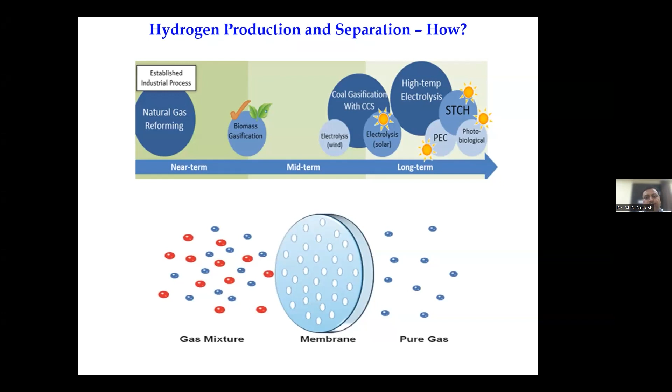So here in this slide, you can see how different characterization results of hydrogen are being showcased, wherein we have a laboratory setup where we make use of a flat sheet membrane, which comes in contact with the hydrogen gas or a mixture of gases, because in this particular case, it is a simulated gas mixture where we have a combination of hydrogen and CO2 or hydrogen and methane together. And since we are testing it out at the laboratory environment, we can only use the simulated gas and not the real gas that is coming out of the gasification process.

So in the simulated environment, we place the flat sheet membrane in a membrane cell and feed the gas. So as the gaseous mixture passes through, the membrane separates out only hydrogen and offers it as a permeate. So these hydrogen molecules effectively permeate through the membrane through the small pores that are available on the surface, and separate hydrogen from the rest of the gaseous mixtures under a certain vacuum environment.

When we tested these membranes, they are typically mixed matrix membranes, which comprise nanoparticles as well as polymer materials. So the combination of the polymer and the nanoparticle effectively brings about the hydrogen separation efficiency to a great level. We also performed mechanical characterization studies in order to study how durable these membranes are and what are the strengths of these membranes.

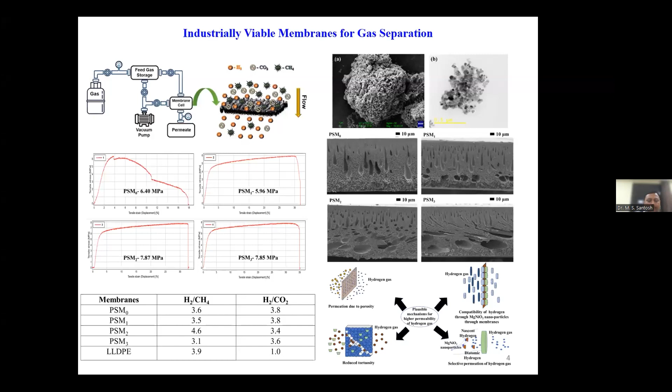Similar to the separation efficiency, as I mentioned earlier, we also work on development of various electrocatalysts. And one such electrocatalyst that we have worked on and developed is sodium iron disulfide, NaFeS2. One of the most interesting aspects associated with this material is that, although it appeared to be a new material when we actually started working on it, it was developed by one of the European groups way back in the 1960s.

So at that point of time, only basic characterization of XRD and SEM was performed on this material after it was synthesized using a simple hydrothermal process. And nothing much was done beyond that.

And while going through the literature, we came across this interesting material, and we tried to reproduce the material in our laboratory. Fortunately, we were successful in synthesizing the material effectively, and we initially started with testing this material for the effectiveness in terms of photocatalytic degradation of pollutants.

When we observed significant degradation abilities of this material, we wanted to expand its application to electrocatalysis and study how good the material is in terms of producing hydrogen or enabling hydrogen production. So in that regard, we also carried out both hydrogen evolution reactions and oxygen evolution reactions on this material,

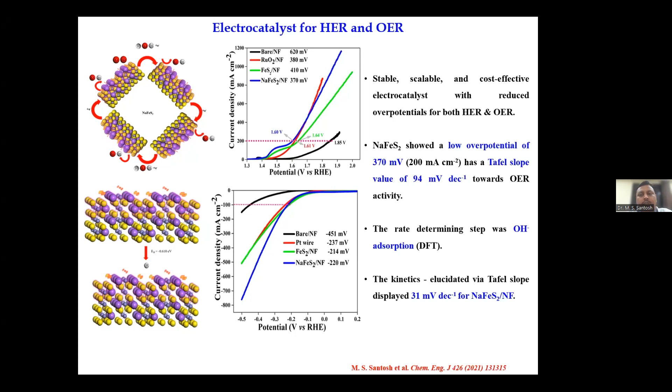And while elucidating the kinetics, it is quite evident that the Tafel slopes clearly display 31 millivolts per dec for the electrocatalyst developed. And this is a clear indication that the material behaves very positively for both hydrogen and oxygen evolution reactions.

On the other hand, we also tried to come up with another material, which is cobalt selenide in combination with graphitic carbon nitride. And for this combination, although a couple of reports were earlier available in terms of battery electrode studies, there were no such reports associated with the hydrogen evolution reactions.

When we took up this material and wanted to explore it, we did not limit ourselves to only electrocatalytic applications. We performed the photocatalytic applications as well as the supercapacitor applications associated with it. So when we carried out 3 different applications, we were able to figure out that the material is a multifunctional material. So when the efficiencies of this material proved to be much higher in all the 3 applications, we could project this material as a multifunctional material for various applications rather than limiting its application to only one area.

So while developing these materials, we also subjected this to photocatalytic degradation of bisphenol, where we obtained 92% and higher degradation efficiencies. And we also found 380 millivolts at current densities of 50 milliamps per centimeter square for OER and HER, and specific capacitance of 153 Farads per gram for the supercapacitor studies.

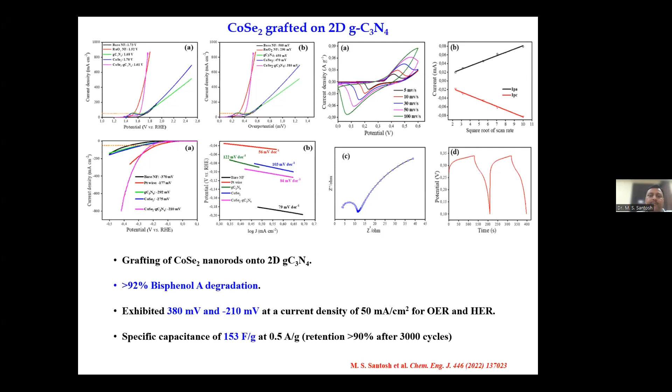Now, coming to the actual part of the work where our strength lies, developing lightweight composite cylinders for high pressure hydrogen storage. This is one of the interesting areas where I think most of the European and American labs have already initiated some works, but in India, we were the first group to initiate some of the activities associated with the development of this particular material and the technology.

There are a few industries and national laboratories in Europe and USA who are specifically experts in developing such types of hydrogen storage materials, pressure vessels for storage of hydrogen under high pressures. But unfortunately, in India, there was no such technology apart from a metallic cylinder that is being used for hydrogen storage applications. But since metallic materials for hydrogen storage undergo severe hydrogen embrittlement, that was not the only solution that we could bank upon.

So we needed to overcome the complications associated with metallic interaction with hydrogen and the hydrogen embrittlement associated with it. Apart from the hydrogen embrittlement, we also faced difficulties in terms of the bulky nature and the heavy weight of the cylinders, which made it difficult to transport these cylinders to different places. So transportation became a major issue.

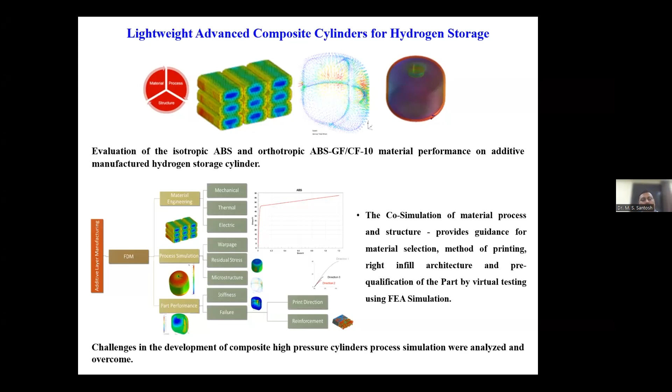So in this process, we took up additive manufacturing as one of the application tools in order to design, define, and carry out some of the simulations and then 3D print cylinders effective for our specific applications. So in that direction, we were able to overcome many of the material associated challenges and could reduce some of the problems that we could face in the initial stages.

When I was talking about type 4 hydrogen cylinders, there are 4 different types of cylinders that are identified in the commercial sector. Type 1 is a metallic liner, which doesn't have any kind of overwrapping on it. It can be either steel cylinders or aluminum cylinders. And it can also be overwrapped with some glass fiber composites, which is called type 2 cylinders. And subsequently, aluminum liner material or titanium liner materials overwrapped with carbon fiber composites are termed as type 3. And finally, a polymeric liner material, which is encompassed or covered with a carbon fiber composite, is called type 4.

There are new R&D developments that are happening in type 5 category as well, where there is no overwrapping on the surface of the liner material. The liner material itself will be strong enough and capable enough to hold the hydrogen under high pressures of 350 to 700 bar.

When we came up with the material design of ABS, that is acrylonitrile butadiene styrene, and tested it as a basic polymeric material, ABS was not capable enough to hold high pressures of hydrogen. So in order to make it suitable, we blended 10% of carbon fiber into ABS matrix and then tested the efficiency. When we carried out some of the preliminary property analysis, such as density, Young's modulus, and yield strength, we were able to identify that ABS improved its properties gradually with the addition of carbon fiber, whereas titanium, being a metal, had its own strengths and weaknesses as well.

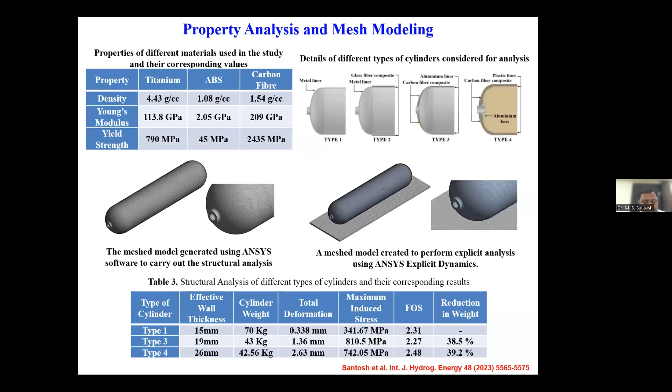So during the design and developmental aspects, we were able to identify how the cylinder can be strengthened. There are two ways: by providing new support structures within the cylinder, or by increasing the layer thickness of the cylinder. Increasing the layer thickness is not a viable option, because that involves a lot of polymeric material, and the thickness of the liner material eventually increases. With that, the weight of the cylinder also gradually increases.

So in order to counterbalance the weight and the number of layers associated with the thickness, we introduced some kinds of rib-like structures within the cylinder. We studied how a rib-introduced structure and a non-rib structure differ in terms of design and the ability to bear the necessary pressures. And we realized that cylinders with ribs perform much better because of the internal structure and the support that it could provide, offering the necessary strength to the liner material compared to the ones that did not have any ribs.

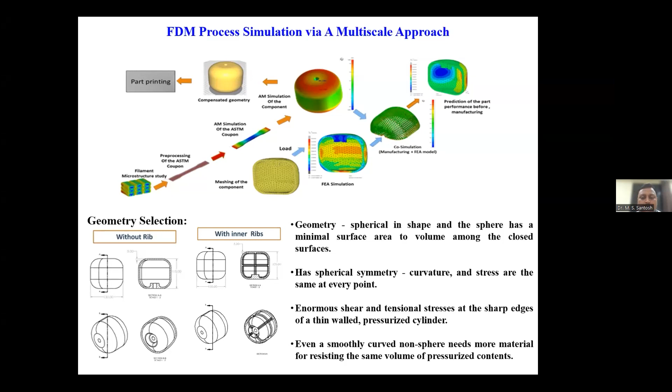So in terms of their performance analysis, we carried out FEA simulations and understood the Von-Mises stress and the displacement associated with rib and without rib oriented structures. By looking at the FEA analysis images, you can clearly make out how different colors indicate the kind of stresses and displacement that the material has undergone. It is not about the stress and displacement the material can bear, but about the ability to come back to its original shape after undergoing such stress, strain, and displacement.

So while carrying out these studies, as I mentioned, by the introduction of 10% carbon fiber to ABS, the percentage efficiency of ABS material increased by about 70%, which is a significant number. And with the 70% increase in strength, this qualified to be used as a liner material.

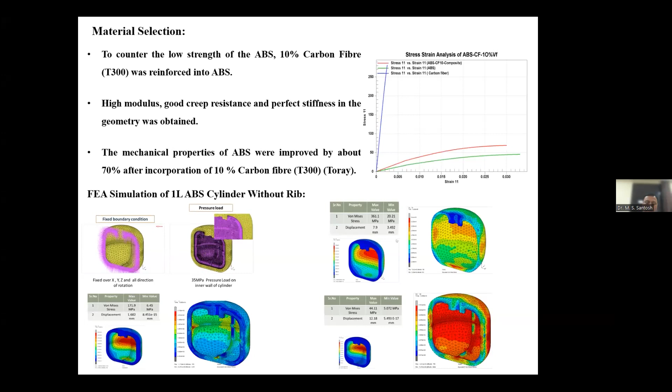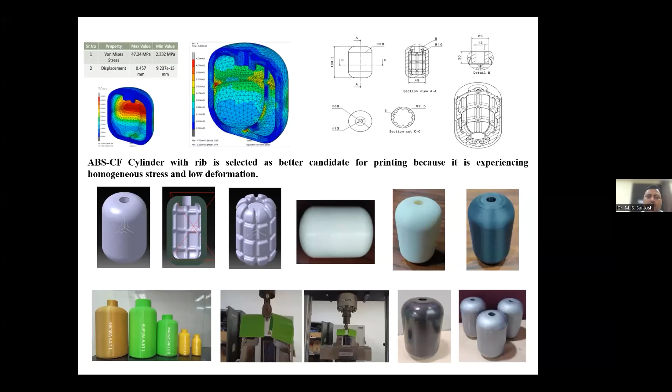And in this journey, we also carried out some aspects of design orientations, considering three different materials like ABS, nylon, and PEEK. And in the kind of orientations like the circumference oriented or the other components associated with it, we could identify which of the three materials were more suitable for such studies.

Although PEEK appears to be much stronger compared to nylon and ABS, PEEK is more of a rigid material that cannot be easily used for 3D printing applications, specifically the printing of cylinders. But ABS and nylon, being more compatible with carbon fiber, were more suitable for such 3D printing applications, especially to be used as a liner material.

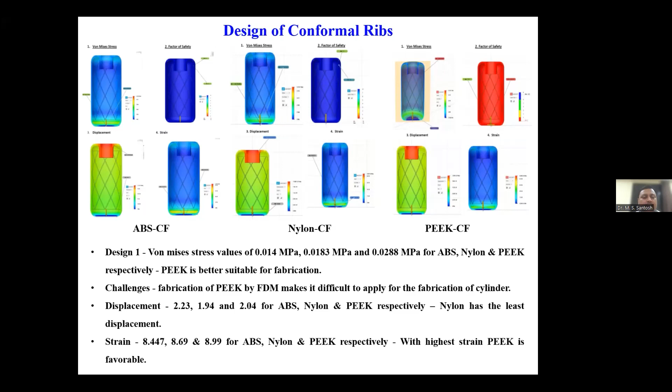And in that journey, we could identify, although there was some amount of displacement seen for nylon and ABS also, nylon appears to be a more suitable material. Nylon is nothing but polyamide materials, and eventually the circumferential patterns or the hoop stress associated with the cylindrical liners were the ones that play a significant role in bearing the required pressures within the ABS and associated nylon or PEEK materials.

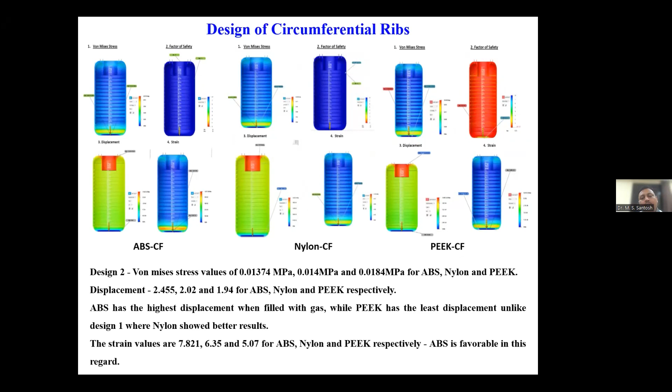So finally, we could come to an understanding that both nylon and ABS were able to meet the requirements of this high pressure hydrogen storage, and helped us in giving a better understanding when we carried out the drop test simulations as well.

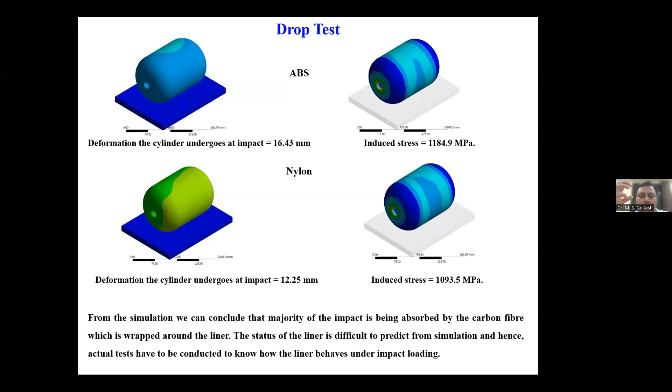So in these drop test simulations, we were able to understand that the carbon fiber overlapping on the surface of the liner material was able to absorb most of the stress or the damage dent that is caused on the surface when it is dropped from a height of 10 feet through the simulation process. So the carbon fiber also plays a very important role being overwrapped on the surface of the cylinders.

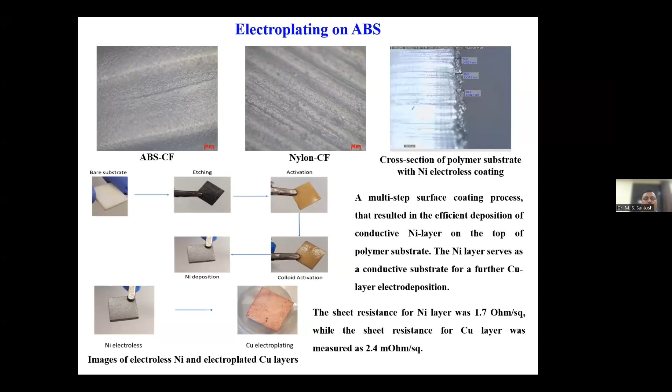So understanding these aspects gave us a lot of information, and also took us to a slightly further analysis in terms of structural and drop simulation analysis as well, where we performed some of the deformation studies and tried to understand how much induced stress was being laid on the surface of the liner material, and what are the ratios at which these variations could really impact the cylinder to a significant level.

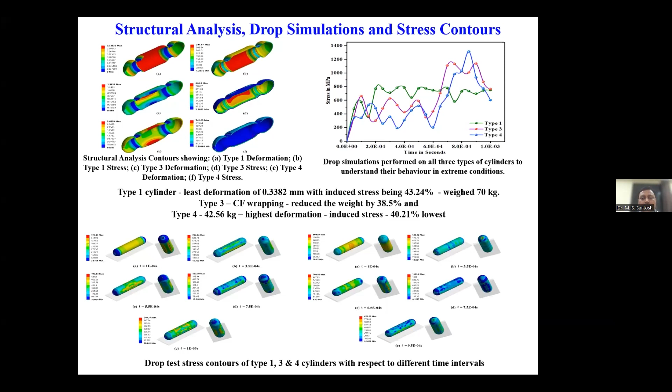Compared to type 1, type 4 underwent higher deformation being a polymeric material, but it was able to sustain the deformation and come back to its original form after the stresses were released, and being nearly 40% lower in weight was quite good enough to make sure that the cylinder is reduced in weight and could be easily used for transportation as well.

And we also performed a crash test through simulations in order to understand how the cylinders behave when a vehicle traveling at a speed of 80 km/h comes in head-on collision with an opposite vehicle and hits with force. What kind of variations do these materials undergo?

And in all these studies, it was quite evident that type 1, although it was not much deviated from the actual structure, could easily undergo deformation and rupture the cylinder and cause a lot of damage compared to type 3 and type 4. And overall, despite the crash test being subjected on all three, type 4 evolved to be a better material compared to the type 1 and type 3 materials.

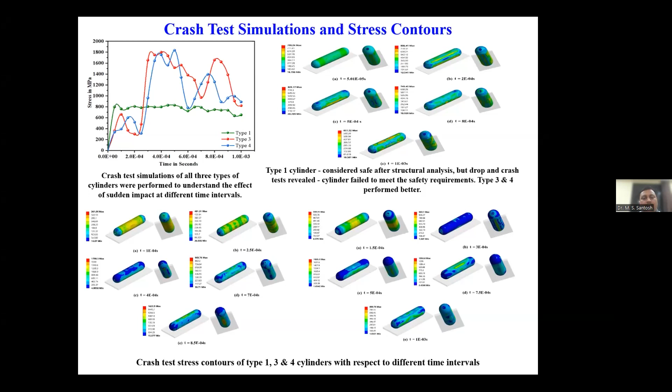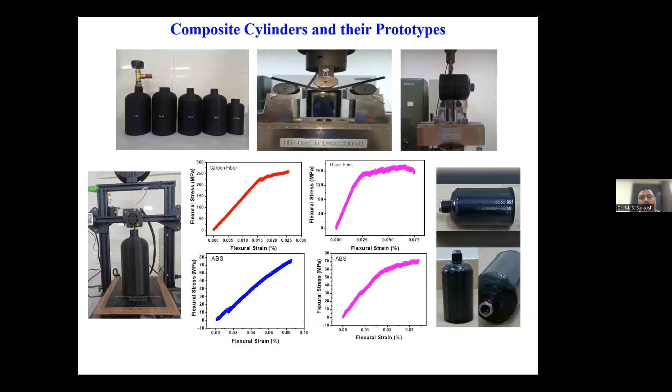These are some of the images that we have 3D printed and carried out some of the mechanical studies associated with these 3D printed materials, and the carbon fiber wrapping that we manually tried to do initially in order to make sure that the carbon fiber wrapping on the surface could hold on to the cylindrical liner materials.